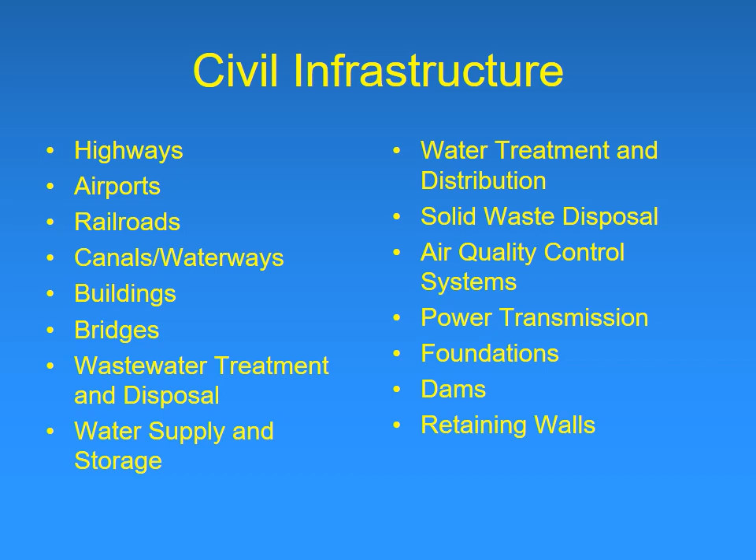The term civil engineering was first used to distinguish it from military engineering, and the societies for civil engineers extend back to the 1770s in Britain and 1852 in the US.

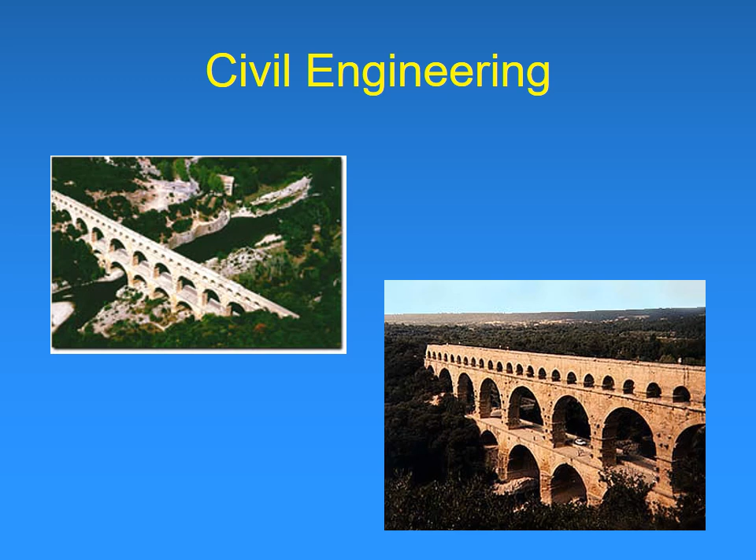There are many great feats of civil engineering in ancient cultures, such as the pyramids, the Great Wall of China, the Roman roads, and the Roman aqueducts, defensive castles of Europe, and the great cathedrals.

The civil engineering department has 6 specialty areas. The general degree in civil engineering requires coursework from all of these areas, but technical electives allow students to concentrate a couple of their courses in one of these areas.

One of the areas of civil engineering is structures. When we think of structures, we often think of buildings and bridges, but there are many other types of structures that are included. The structural engineer must know a lot about construction materials such as steel and concrete, and must use mechanics to design these facilities.

Buildings can be extremely small or quite large, such as skyscrapers, as well as bridges can be very simple to the very complex.

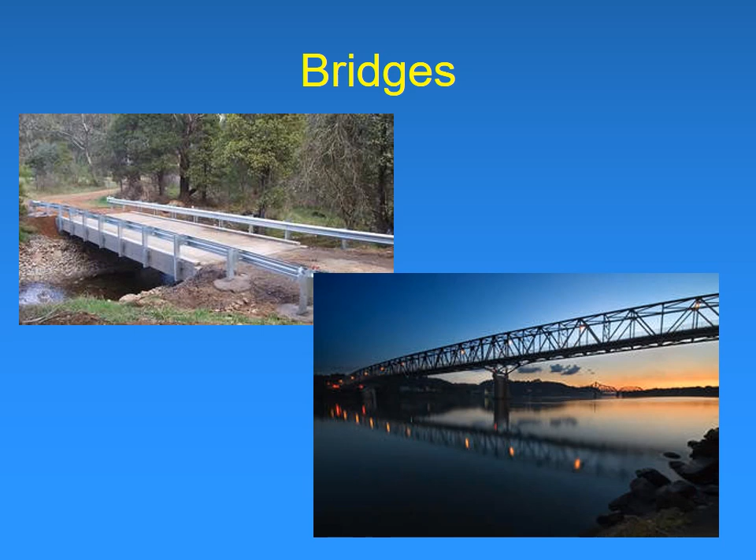The second area in civil engineering is geotech, which involves the strength of soils, looks at foundations and slope stability, involves retaining walls. Geotech projects are often using geosynthetics, and they are sometimes involved in the design of dams.

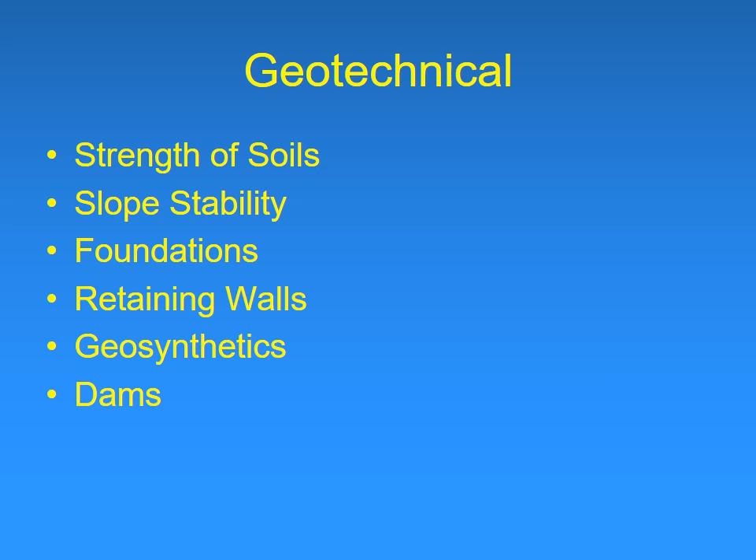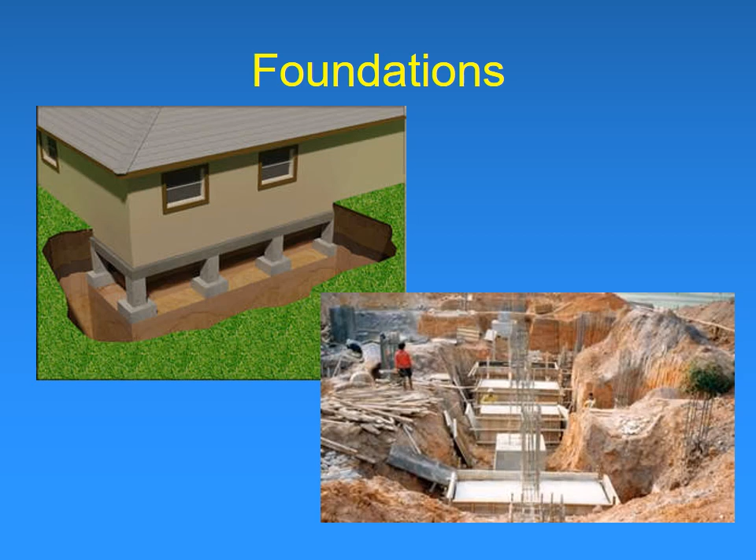The foundations for buildings can be very simple for small buildings to very large for very complex structures such as a bridge or a large skyscraper. Likewise, retaining walls can be fairly small as well as quite complex.

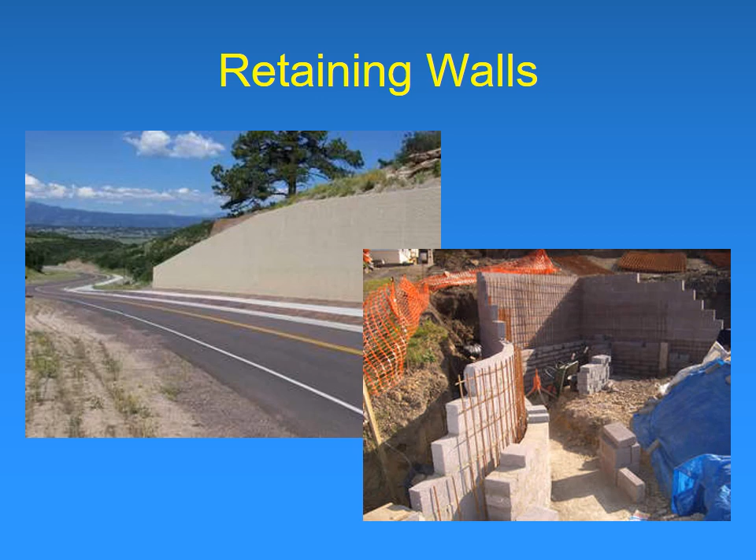The next area of civil engineering is water resources. The water resources area deals with hydrology, which involves rainfall and rainfall runoff, water transport, drainage, flood control, and groundwater supply and recharge.

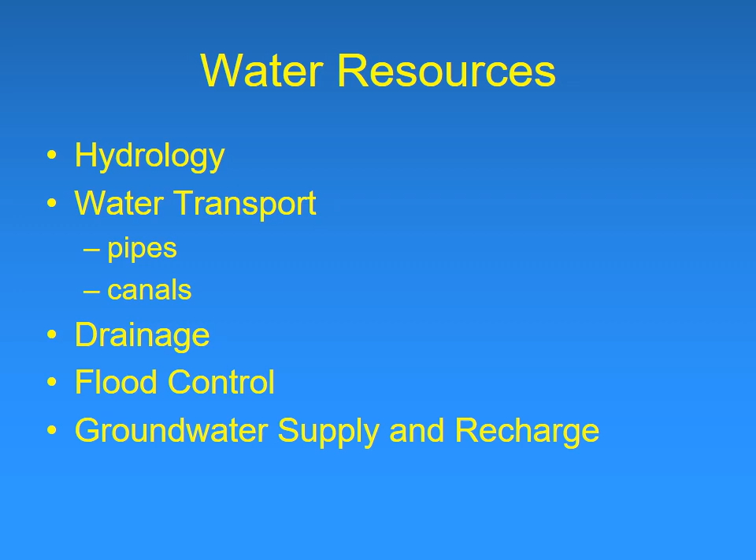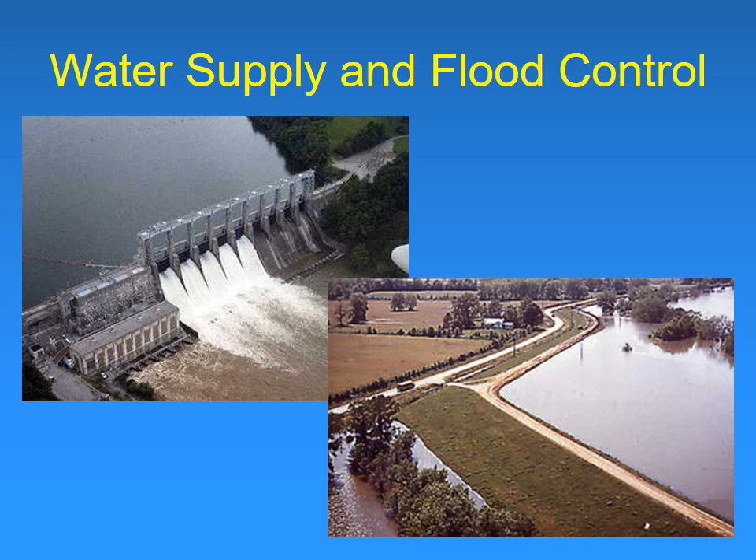While water resources engineers do not design the actual structures of a dam or a levee, they are involved in the planning of the facilities themselves. Water resources engineers are definitely critical in the control of local drainage.

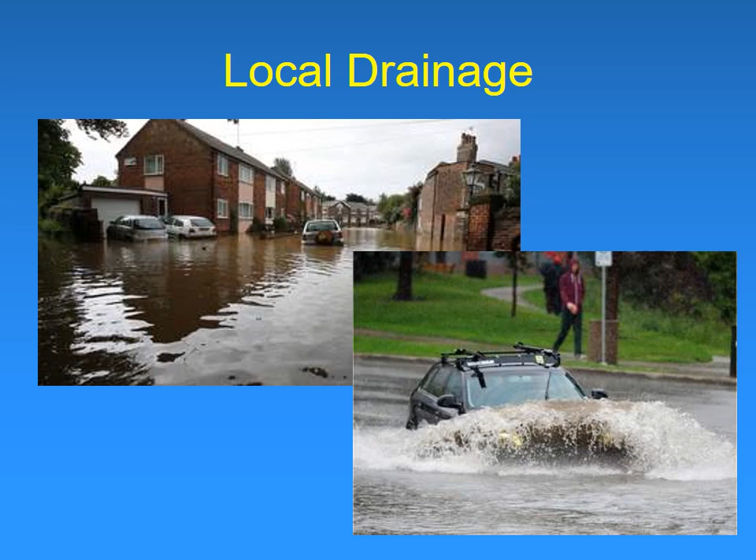They're often involved in the planning of big projects such as the State Water Project in California and the Panama Canal.

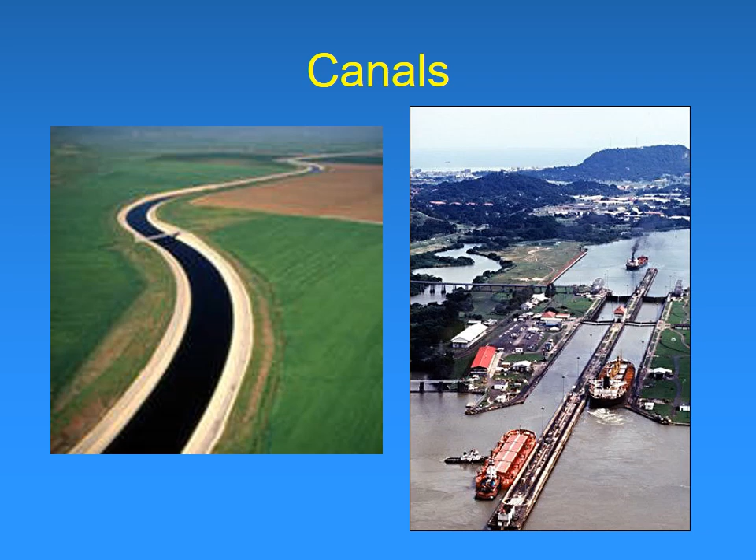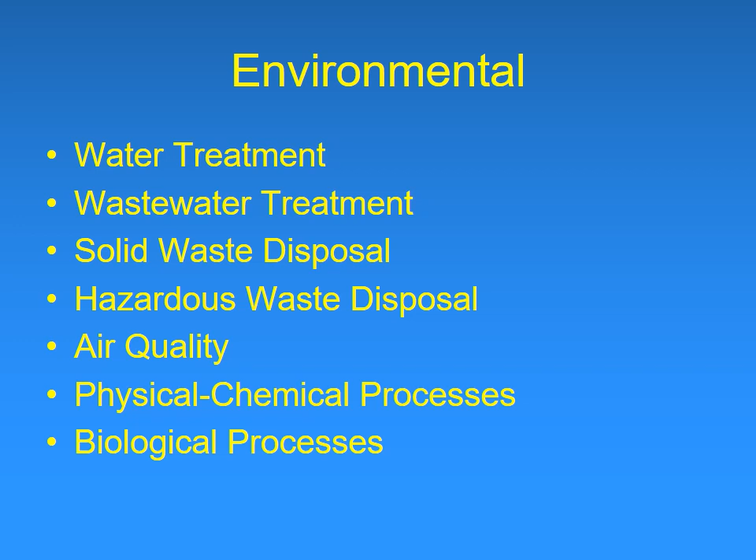An area of civil engineering that many don't associate with it is environmental engineering. Environmental engineers design water treatment and distribution systems, wastewater collection and treatment systems, solid waste disposal, hazardous waste treatment and disposal, and air quality systems. The environmental engineer uses physical, chemical, and biological processes in the design of these facilities.

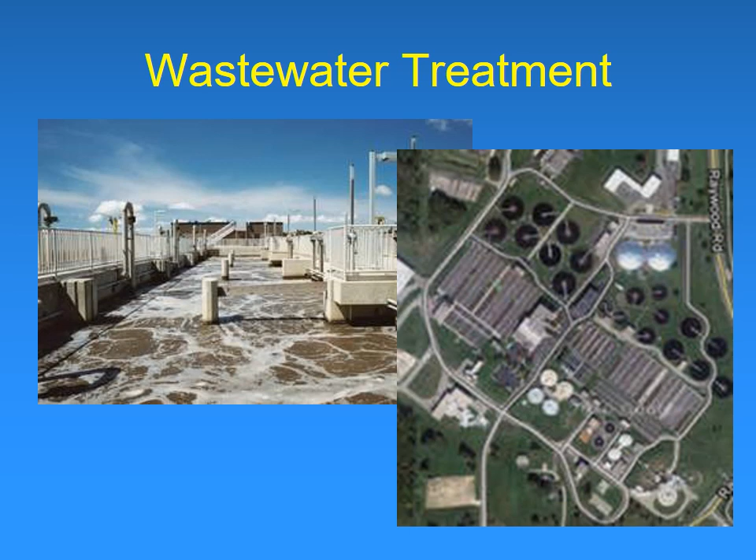This can include wastewater treatment plants, which take raw wastewater and convert it into practically drinking water using microorganisms.

Drinking water treatment takes the water out of our lakes and sometimes the ground and converts it into safe, potable water.

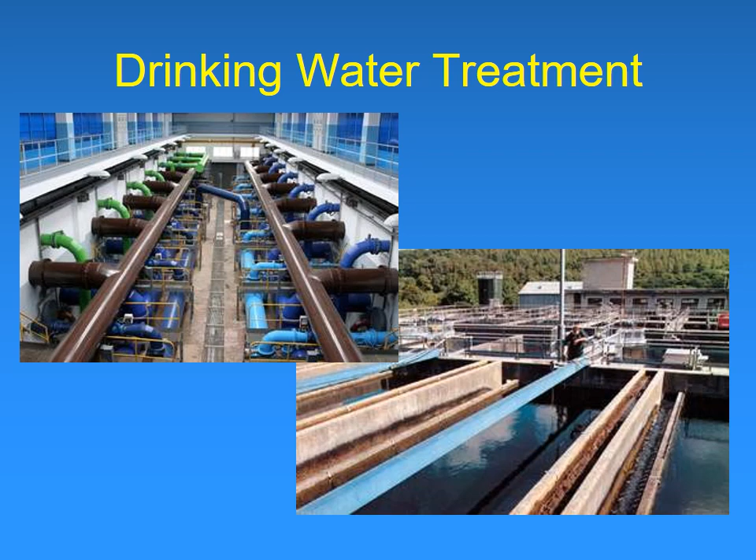Solid waste disposal involves the selection of sites for landfills and the design of the landfills themselves, including the leachate collection system and the liner.

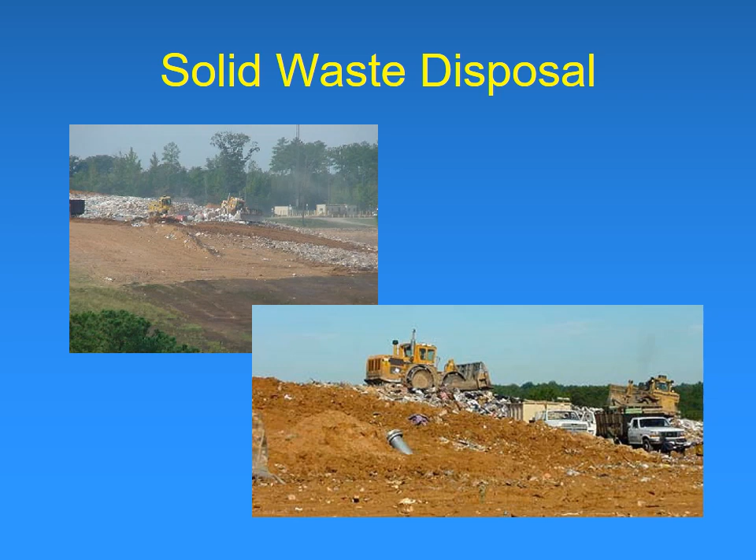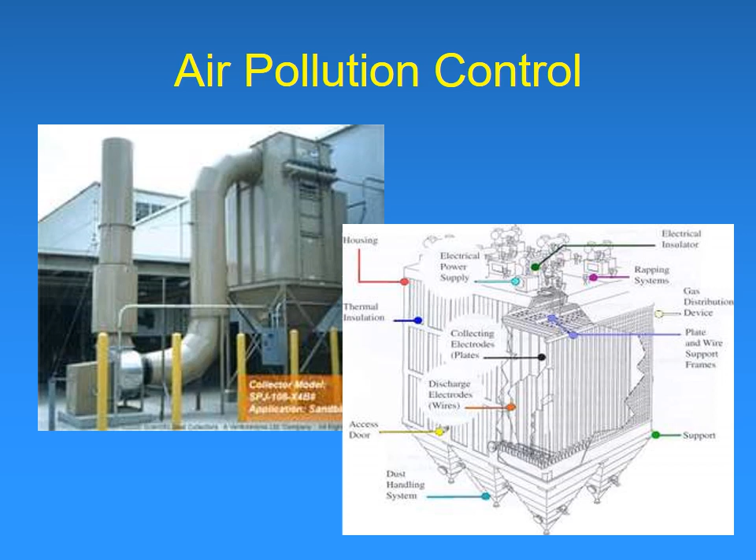Many industries need air pollution control equipment, such as a baghouse shown here, which removes particles from different air pollution streams.

An area that we're all familiar with from civil engineering is transportation, which includes the planning, design, construction, and operation of highways, airports, railroads, and ports.

Many of the airports are planned, and the runways and the taxiways are designed by civil engineers.

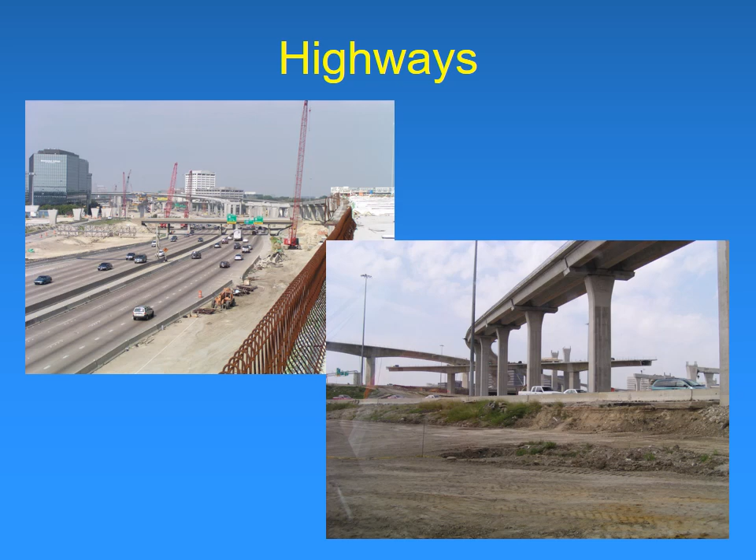We're all familiar with highways and their importance to our daily life, and we often see railroads that cross our highways. These railroads are responsible for the transportation of the majority of the freight in the U.S.

So where would you work with a civil engineering degree? In some cases, you would work for federal, state, and local governments, doing planning, operations, maintenance, construction supervision, and some design.

The majority of civil engineers will probably work for consulting firms doing design of facilities for the federal, state, and local governments, and will be involved in some of the operations such as transportation systems.

One of the employers of civil engineers is the construction industry. One of the largest employers are those that are doing land development, building new subdivisions, shopping centers, and so forth.

The next program in our civil engineering department is the architectural engineering program, which involves the planning, design, and construction of all aspects of buildings, including the structure, the lighting, the plumbing, and the HVAC systems.

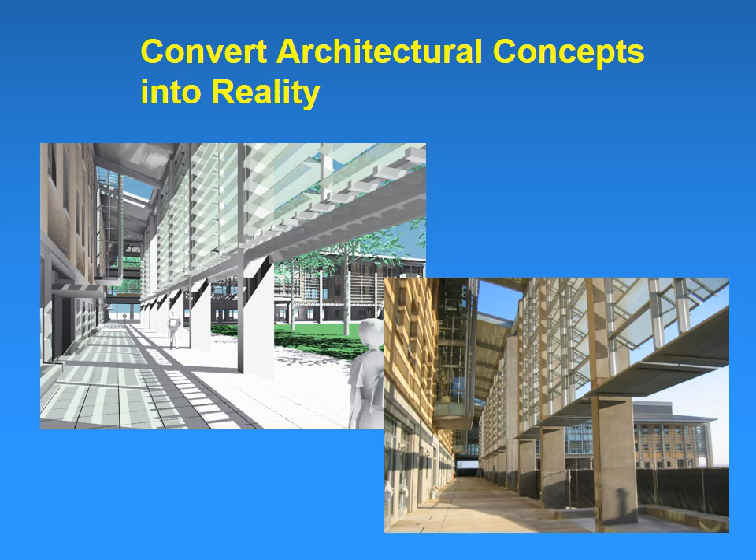One of the more important things they work on is mechanical and electrical systems within buildings, which can be quite complex.

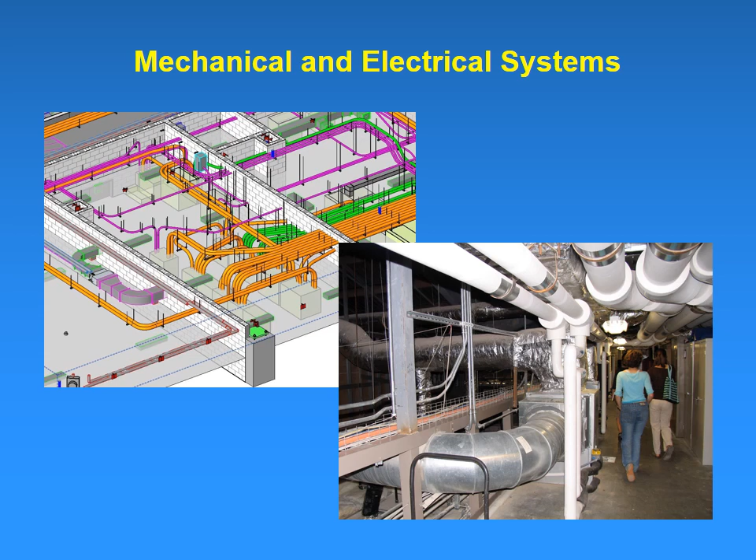Where would you work with an architectural engineering degree? Almost exclusively in consulting as part of an architecture engineering firm, and some architectural engineering firms do construction management.

Our third program in civil engineering is the construction management program. Construction management deals with overseeing the construction of all types of designs. The construction will require initial planning, scheduling, and cost estimating, bid package preparation, and bid awards.

Construction also includes inspection and supervision, interaction with the design engineer, and construction managers are responsible for assuring worker and public safety.

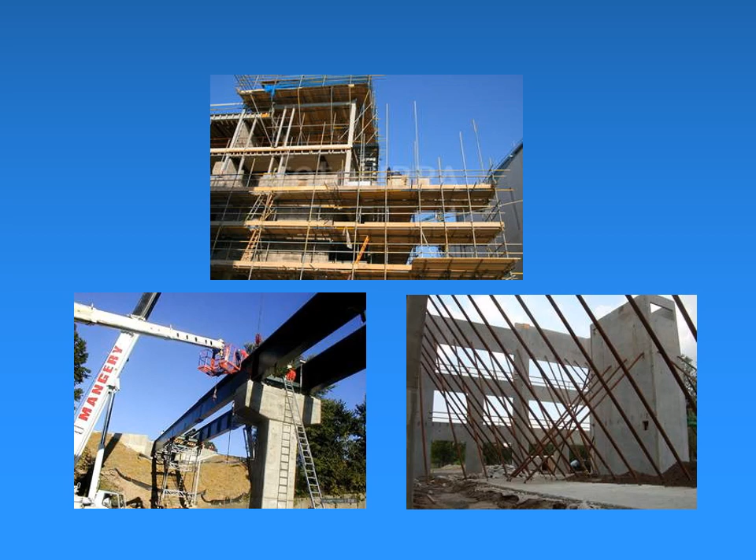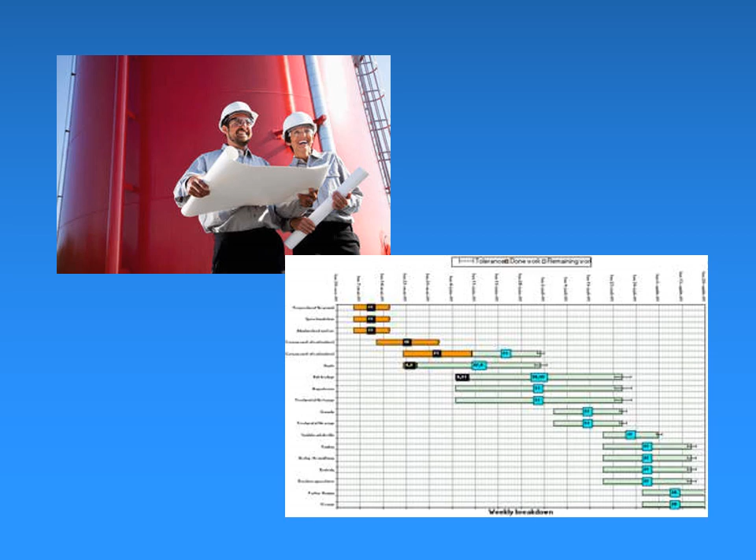Construction managers work on all types of projects you've seen earlier, from buildings, bridges, to transportation projects. They need to be aware of scheduling and overall management of the project.

Where would you work with a construction management degree? Most often with a construction management firm. You can work for engineering firms and contractors. Government agencies also use their own construction managers.